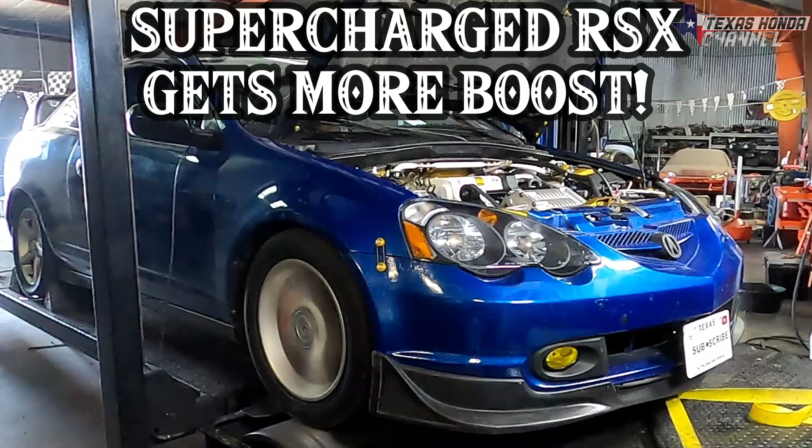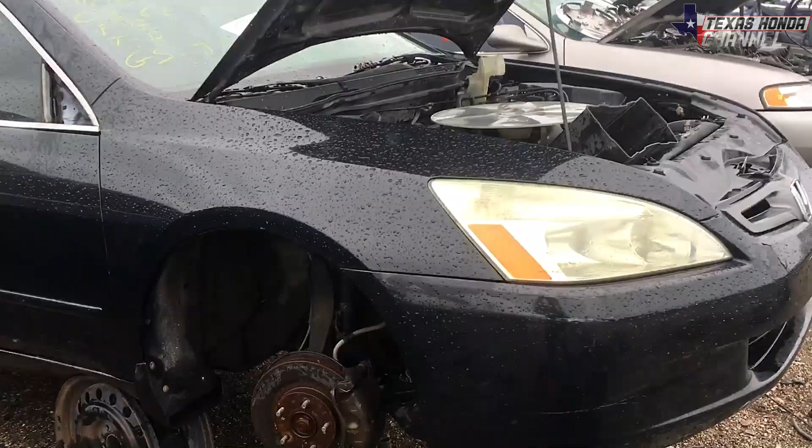Built in Texas. This is a K24 Honda Accord. It's a 2003. And if we take this K24 crank pulley off and put it on my K20, it will increase the boost. So I'm gonna go ahead and get this crank pulley off of this engine, and I'll explain some more.

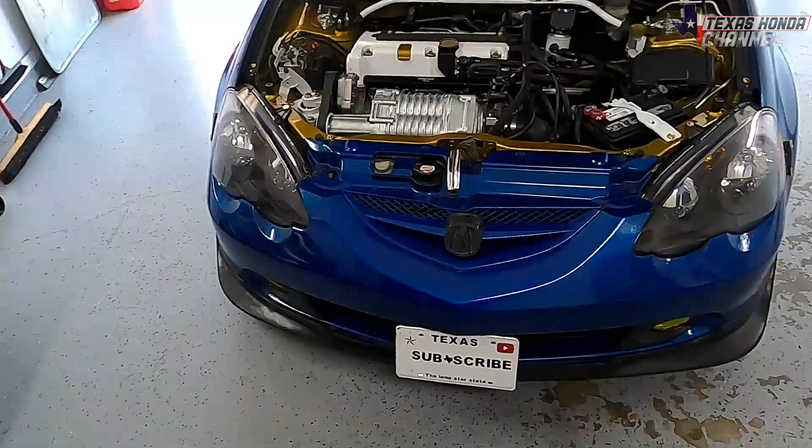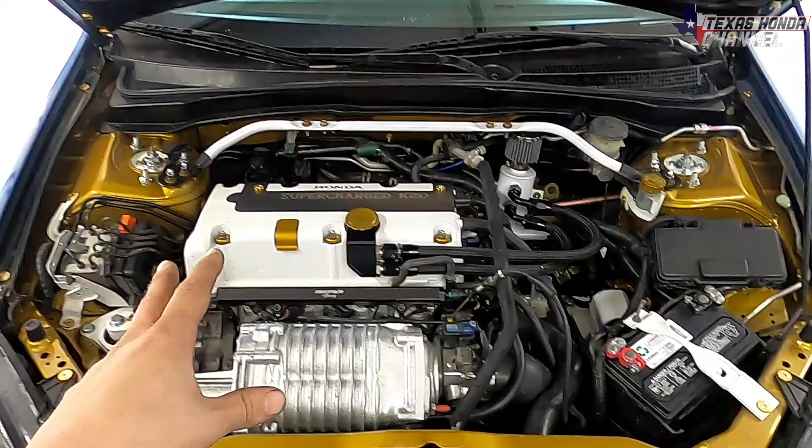So we are going to be taking a K24 crank pulley out of a 2003 Accord K24 engine and putting it on this K20 supercharged setup, which will give us more boost. Then we will be taking it back to the dyno to see how much more power it makes. I did the video last night of putting the pulley on. I'll show you that here in just a second.

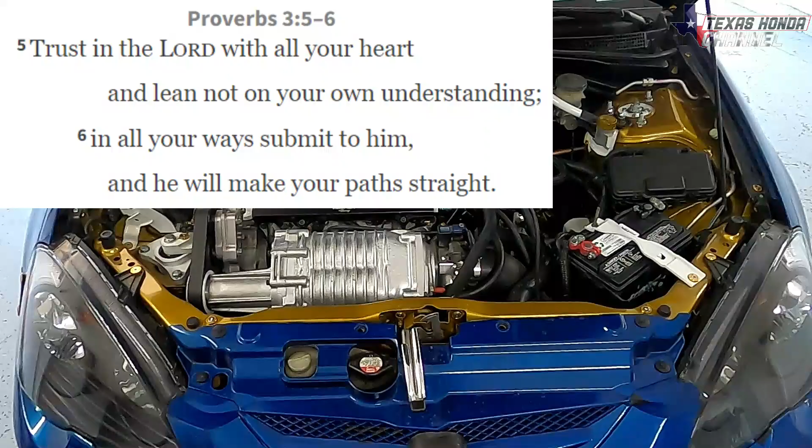But before we get started with that, we're going to be doing Proverbs 3 verse 5 through 6. Trust in the Lord with all your heart, lean not on your own understanding. In all your ways submit to him, and he will make your paths straight. This has rang true in my whole life. I started submitting more to God and being more about him, and things just started getting better. My attitude, my temper is not as bad anymore, and things are just going good. It doesn't mean that I'm perfect in any way, shape, or form. I'm a sinner just like the rest of you guys and needing salvation. I say this out of love, not hate, not to condemn.

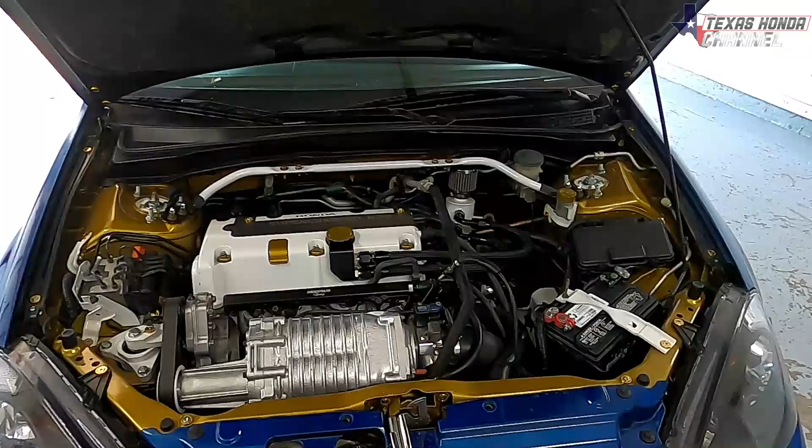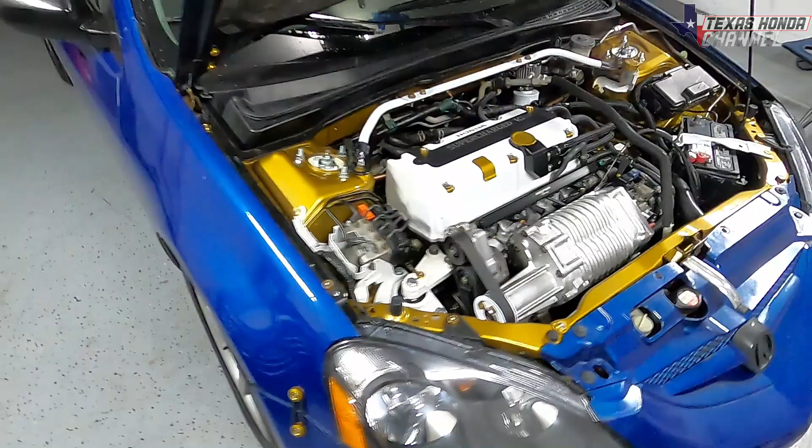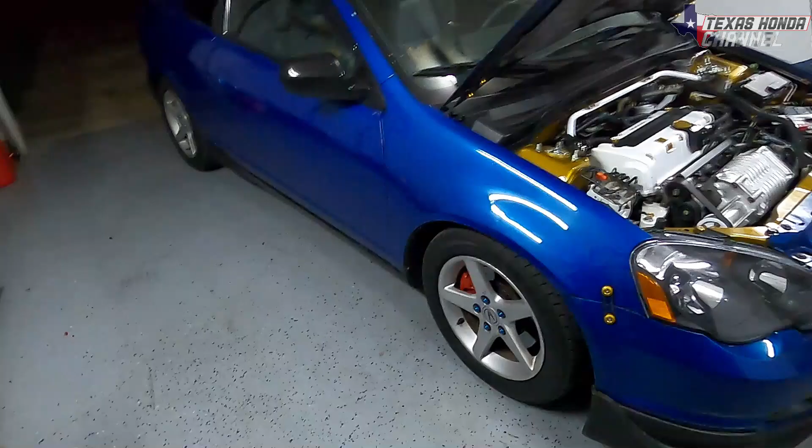I love you guys. But we're going to go ahead and get into the video parts I took last night, so I hope you guys enjoy. Basically just going to get in there, get that crank pulley out, and once I get it out, we will measure, and I will show you how to measure these using this and that math that you probably never thought you would use, pi 3.14. So I'm going to go ahead and get that crank pulley off. I really hope you guys enjoy this video.

All right, so the first thing I'm doing is heating up the actual bolt. This will help loosen it up. I wish I could have done this at the salvage yard, but they don't allow torches in there. People just aren't responsible enough to not blow things up. But yeah, so I'm heating up the bolt.

I want to be very careful because this does have rubber in this pulley. If I do need to use this pulley again, I want to make sure that it's usable. So I'm just heating up the bolt to expand the metal. Then I am going to be shoving this bolt in the flywheel. So I'm going to show you that here in just a second.

Okay, the crank pulley bolt is nice and heated up. Under here you can see we have a racing flywheel. Took a little cover off, you can see the flywheel there. And I put that big thick bolt. It fits perfectly in those grooves, in that little hole, and it's thick enough on the flywheel this will not damage anything. I've done this before many times on different setups, never had a problem doing it.

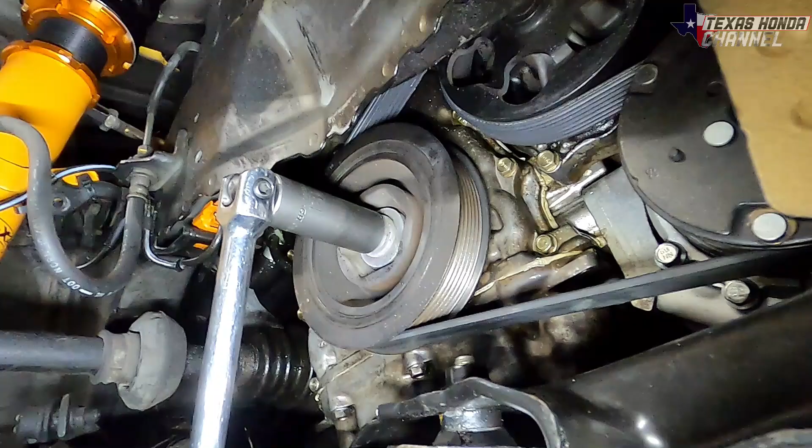Or you can stick a screwdriver in the flywheel teeth and wedge it to a stopping point, and then you can break it loose. I highly recommend using the actual tool for these crank pulleys, or harmonic balancers, whatever you want to call them, because this will be the best option. But since I don't have that right now, this is what we're going to do.

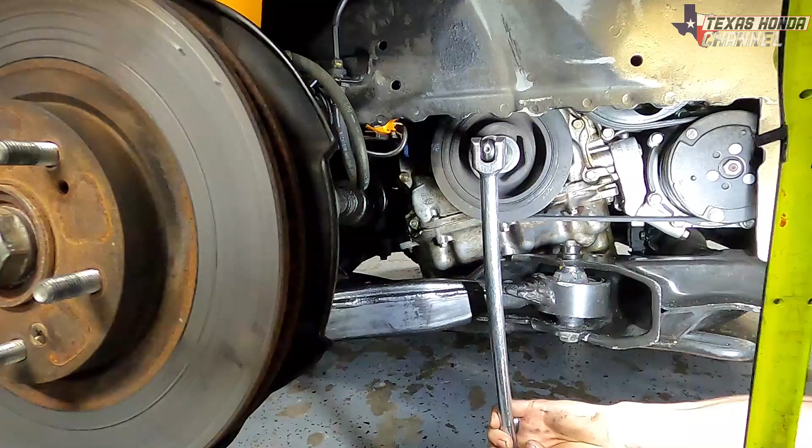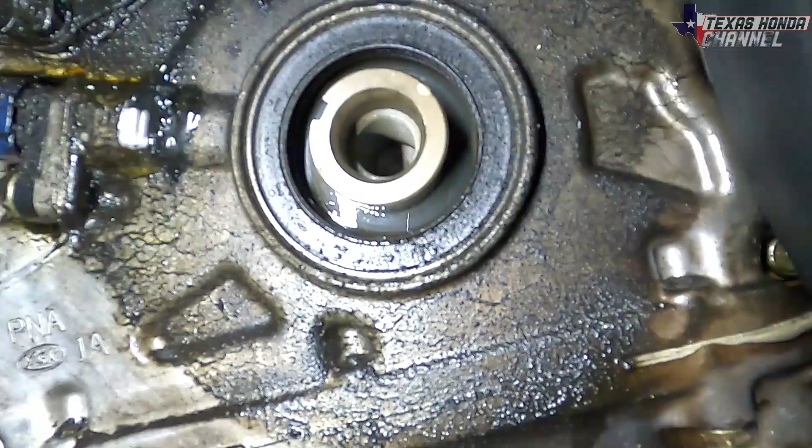Okay, upon closer inspection, we can see that front main seal is actually leaking a little bit. And it looks like at some point something was rubbing against the timing case, but I'll definitely clean that up and keep an eye on it. I do need to get a new front seal for that, so fix that leak. But yeah, we're going to go measure the pulleys.

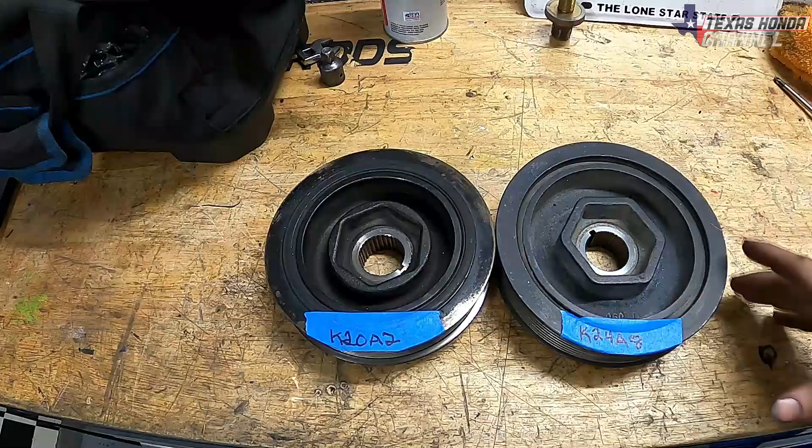Okay, we've got both harmonic balancers next to each other, crank pulleys, whatever you want to call them. We've got the K24A8, which you can tell is just slightly larger than the K20A2. We are going to measure them. This one's still a bit warm, so we'll measure this one first, let that cool down some more.

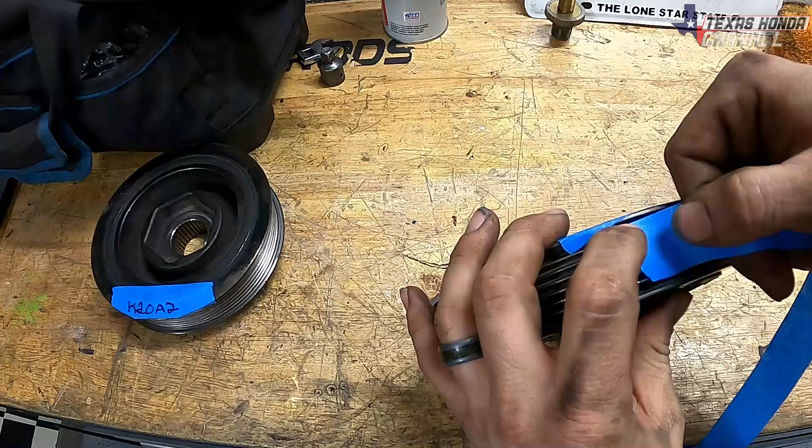You're just going to basically get some tape. We're going to start in one spot. We'll just start right here. Anywhere is fine. We'll keep it in the grooves all the way around, making sure it's pulled nice and tight. That way you've got a good measurement here. I mean, that's close enough. So what we're going to do now, go ahead and pull this tape off and lay it out.

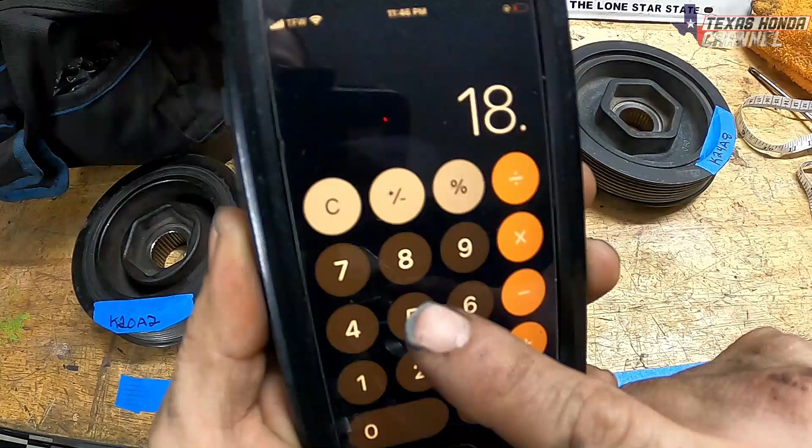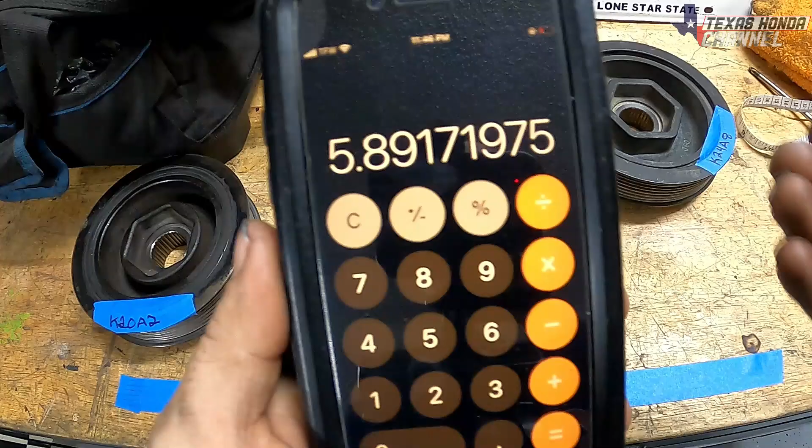Okay, we're going to go ahead and measure the tape from end to end, and we've got 18.5. So this is 18.5 inches. So what we're going to do is go 18.5, divide that by 3.14, which is pi, and we've got 5.89 inches. So this is pretty close to a 6-inch pulley. So we're going to do that same thing to this one.

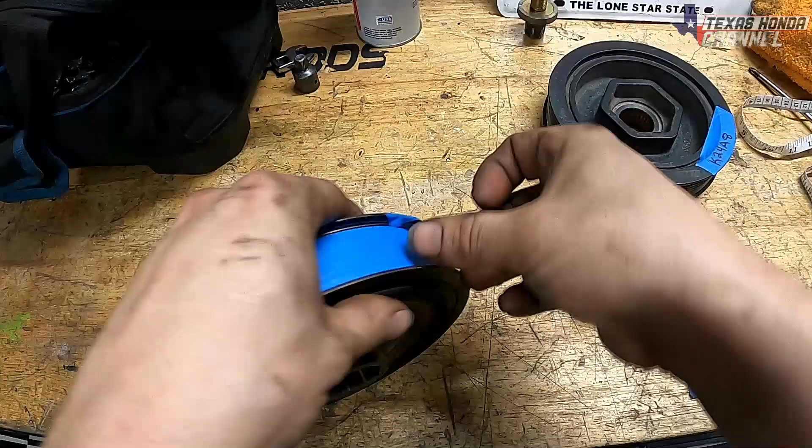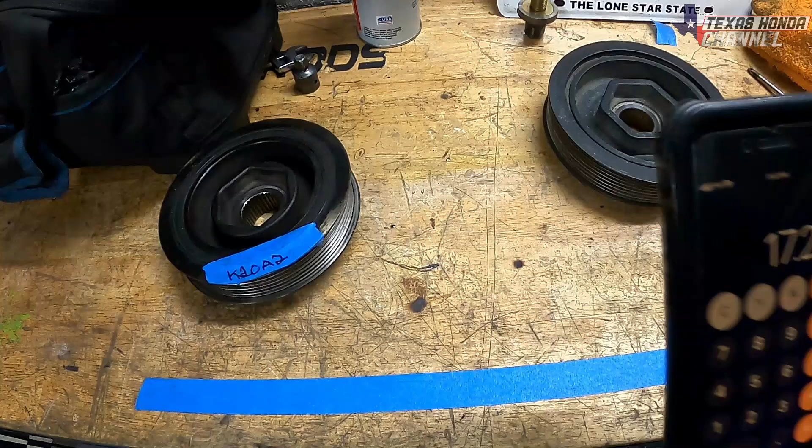All right, this one is 17 1/4. 17.25 divided by 3.14 equals 5.49. So this one is almost a 1/2 inch bigger, which should result in a decent bump of boost. There was someone saying that some of the K-Series pulleys are actually 7 inches. There's a 7-inch pulley out there, which would definitely bump it up, probably 12 PSI. So definitely interesting to make a note of.

So we're going to reinstall this one. Make sure to keep track of the keyway, and we're going to use the bolt that was originally with this pulley. Make sure everything fits. But yeah, we're going to go to the car. I went ahead and cleaned up all of this with brake clean and a rag. Looks a lot better. We can definitely see where it's leaking from after this is all cleaned.

So when reinstalling this, make sure to put the keyway in first. It's easier that way, for me at least. Then we slide it right on there, making sure the belt's not behind it. Okay.

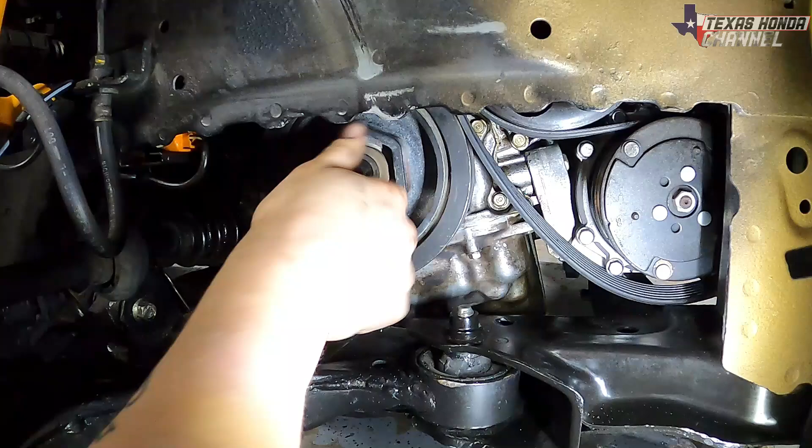And with this bolt, you're supposed to torque it down to 36 foot-pounds plus an extra 90 degrees. If you don't know what that means, once the torque wrench clicks, I go for 90 more degrees. So that's exactly what we're gonna do. Normally I just hit it with the impact and tighten it down that way, put a ton of force with the breaker bar, and I never have an issue. So if you guys want to torque them, I highly recommend torquing them, but just tightening the crap out of them works really well too. I'm just going to be honest with you.

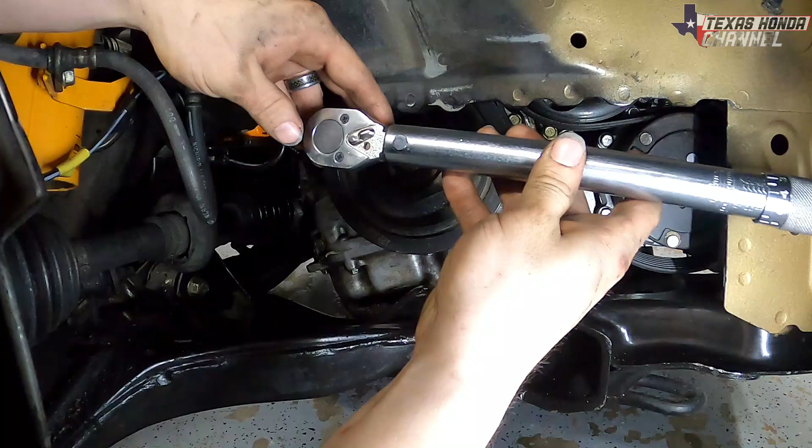All right, I got it torqued with the torque wrench to 36 foot-pounds at about right here. So I'm going to go 90 more degrees. And instead of using this, because it's kind of hard to get leverage with that torque wrench, I'm actually going to use the breaker bar, get more leverage with it. So I'm just going to be putting an extra 90 degrees on it now that it's torqued. And there it is. It's officially torqued down.

So now I'm going to go ahead and put the belt on. You're probably wondering, how are you going to put the belt on if this is a bigger crank pulley? The top adjuster does adjust, so I'm going to have that adjusted. So I'm going to go ahead and do it.

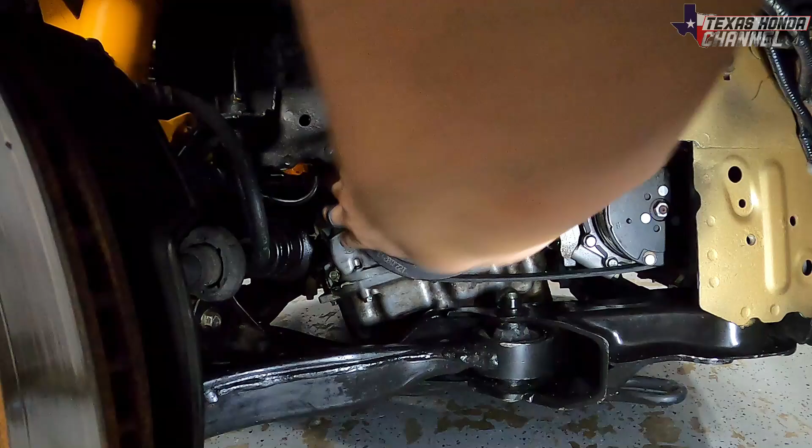All right, so on the back, there's 14mm nuts on this particular adjuster. So I had loosened them up, and then there's an adjuster bolt that goes up top here, and I took it all the way out so that way it could adjust where it needs to. And the belt seems to have plenty of tension, but not too much tension, so we shouldn't have any belt slip issues or anything like that.

Everything's looking pretty good. So I'm gonna go ahead and tighten that bolt back up, and that's pretty much it. Now it's ready to start up. Okay, now that everything's tightened, we made sure the bolt is not left in the flywheel or anything like that. I've had that happen before. It was a very humbling experience, to say the least. Belt tension looks good, so I'm gonna go ahead and fire it up and we'll take it for a spin.

Even at the lower RPM range, I can hear it. It sounds really good. Okay, so I got it all together last night, went ahead and did a data log run just to find out it was only making 1 PSI. So here's the little video clip of that.

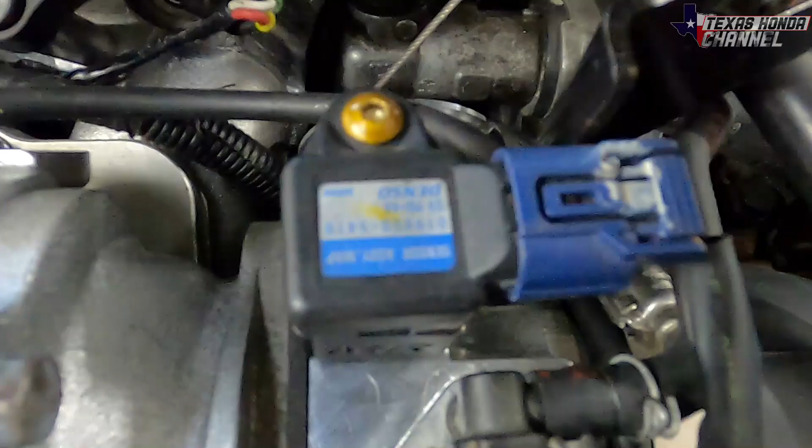Video clip was of it making 1 PSI. I was kind of confused because it still pulled pretty good, I thought. I changed the MAP sensor out and thought maybe that's what it was. So that wasn't what it was. So I decided to look down at the bypass valve down there, and it was actually pinched. It was very weird how it was set up.

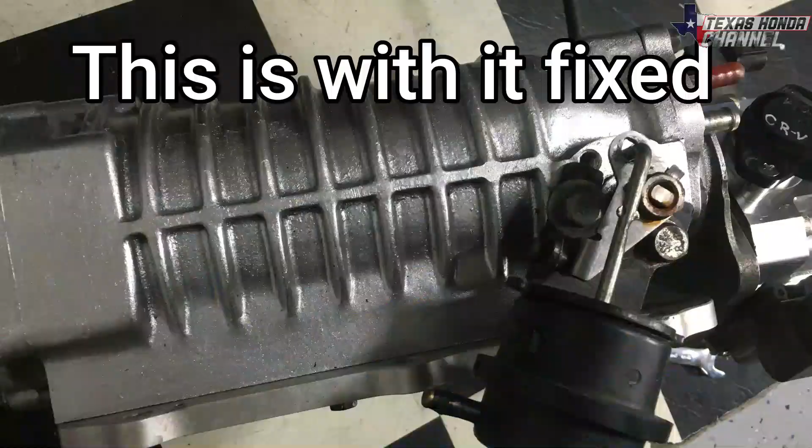I don't know if it was a mistake I made, probably, but I went ahead and took the supercharger off. I didn't do video of that. I was just trying to figure out what was causing the problem, and I got it put on there properly. And now the bypass valve is working properly. So here's a video clip with me just fixing the bypass valve.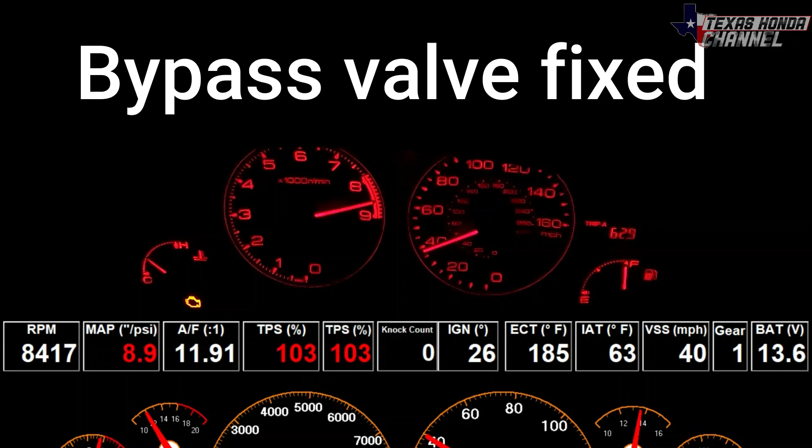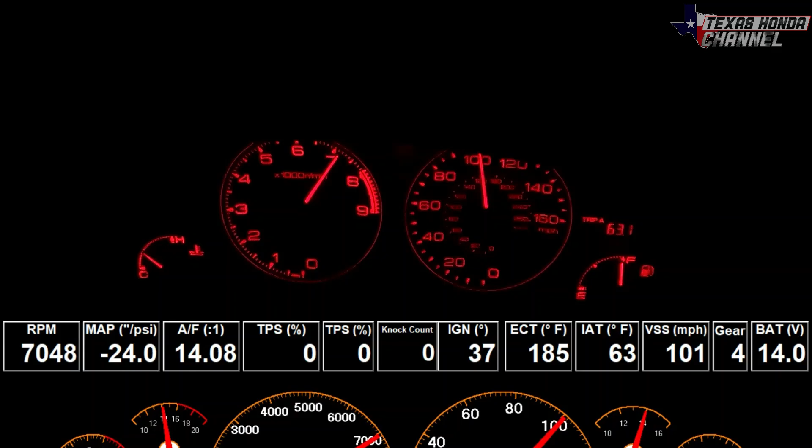So you can see, totally different, way faster now. It blows the tires off like crazy, and that's what I expected the day I pulled it off the dyno, but I just thought, well, this is how the setup's responding to it. So I was only on 1 pound of boost that whole time, which is crazy. So with that being said, we headed back to the dyno at AGN to see what it made, and here's the results.

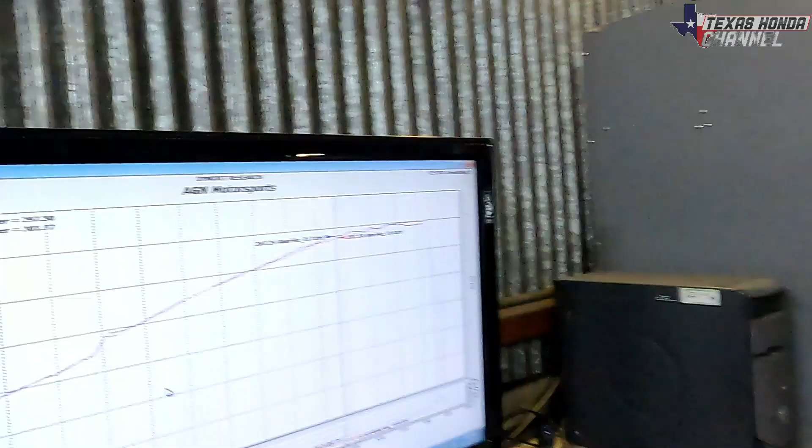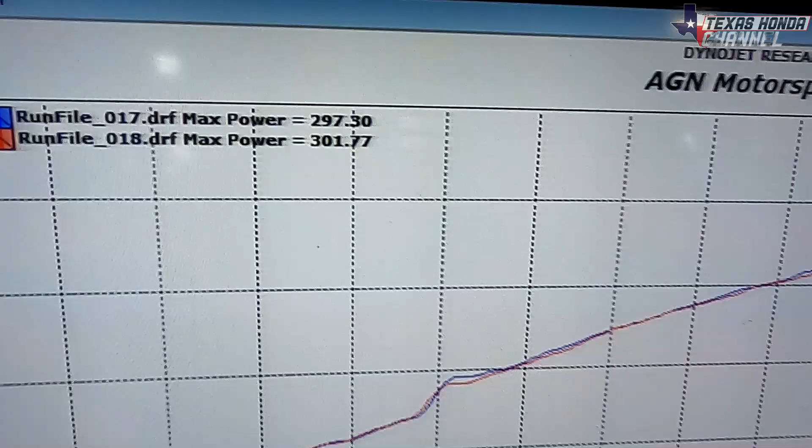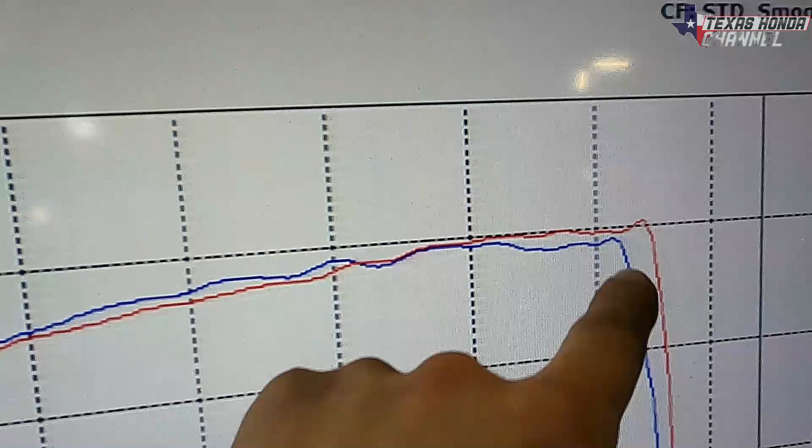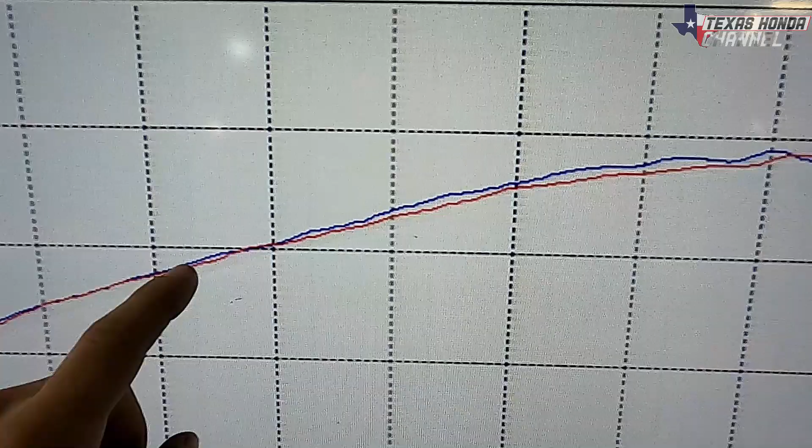Okay, so here it is. The first run file was run file 17, made 297, and then he had to adjust the fuel and stuff, makes 301 now. The blue file, as you see, has a little bit more power in certain areas, but it drops off a little bit on top end. That was because it was leaning out. After he added more fuel and made it safer, it actually lost a little bit of power when you add too much fuel, but it's safer this way. So that red file lost a little here, but it did gain on top end, so that is awesome.

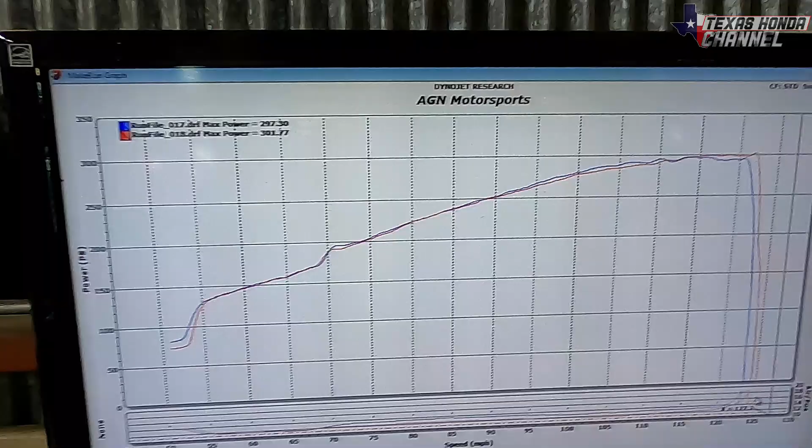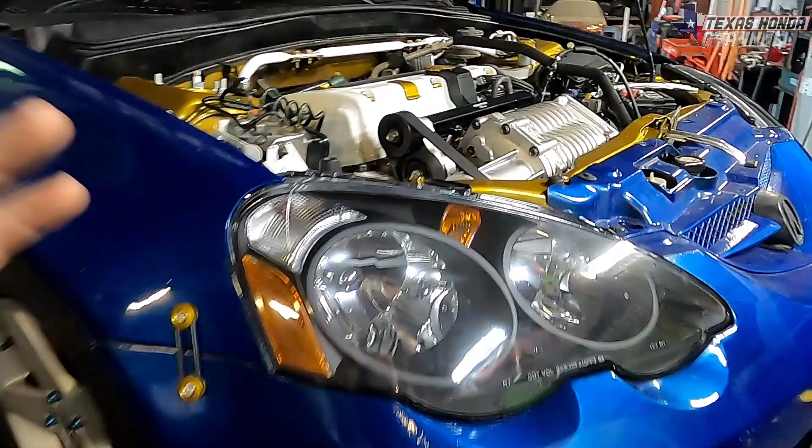He could have made more power with this setup, but that would push the limits of safety. I'm already doing that with the supercharger spinning at the RPM it is. By just putting that K24 crank pulley on there, it definitely is spinning at a higher speed. I think we're spinning the supercharger at 16,000 RPM. John Bond Performance actually gave me the math equation to figure that out.

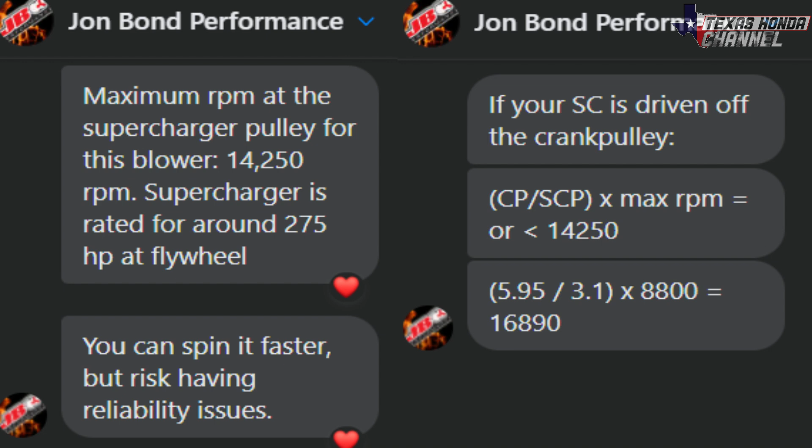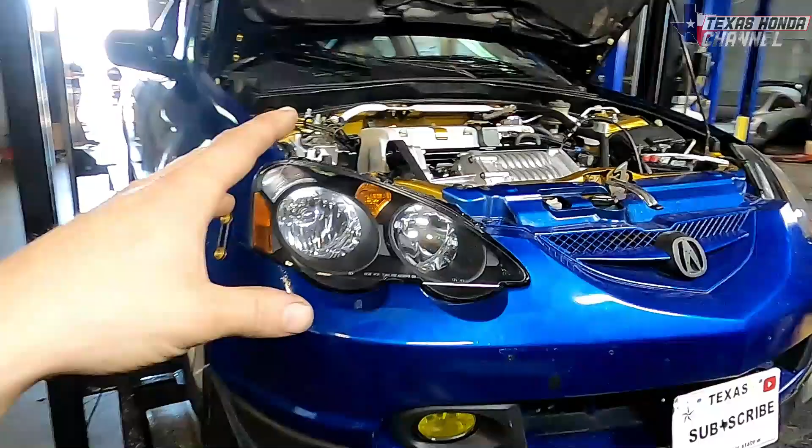So it's spinning 16,000 RPM with this current setup, and this supercharger is only rated for 14,000 RPM. So I do have to back the revs off a little bit, but not a big deal. It'll still feel really good. He said that this will just make it not as reliable, so there could be an issue, but there's a lot more people out there that made more power than this on this kit. So I know I can make more power, but I don't want to make it unsafe.

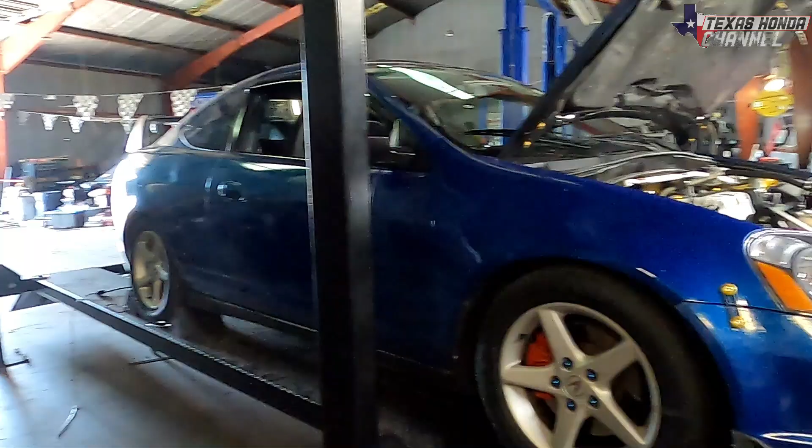But I'm gonna head back to the house. We'll go over more when we get there, and I hope you guys are enjoying this video. All right, here we go.

Wow, this thing's insane. I am super happy with those numbers. 301 is definitely better. A lot of people are asking me if I'm going to go E85 or stay on 93 plus the octane booster.

I personally don't like E85, mostly because I go through it a lot. Every vehicle I've had E85 in, I get terrible fuel mileage, and I'm actually filling up more frequently using E85 than if I was to just use 93. I know it doesn't really make sense, but it's supposed to be more, you know, environmentally friendly or something, but I'm actually filling up more often. It actually cost me more money in the long run to run E85, and I'm just not made of money.

But either way, I will use the 93 daily because I have a tune for 93. It'll be good for that. And then when I go to the track, I will put the 93 plus octane booster tune on, which will make me at 101 octane. Those will just be for track days, so it'll work out perfectly in the end. But yeah, I'm really happy with this and well pleased with Eric's tuning methods. He made it safe but made it make power, and there's still a ton we can do to make even more power.

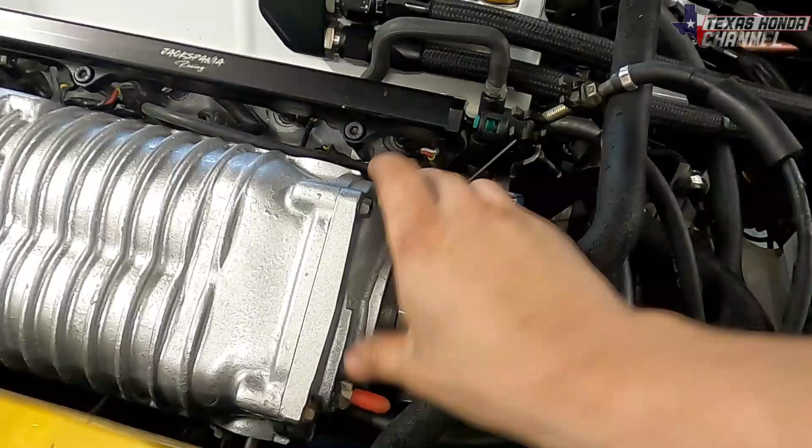They have an adapter here that smooths out the supercharger's intake flow. I already have an upgraded throttle, so I won't need one of those. I just need that piece, but it's like $400, so I don't have money for that right now. But regardless, 9 pounds of boost is just the right number. That's what I wanted on this setup. We can also swap K24 cams in it to make a little bit more bump in power and do some port work. Like, there's still a lot we can do.

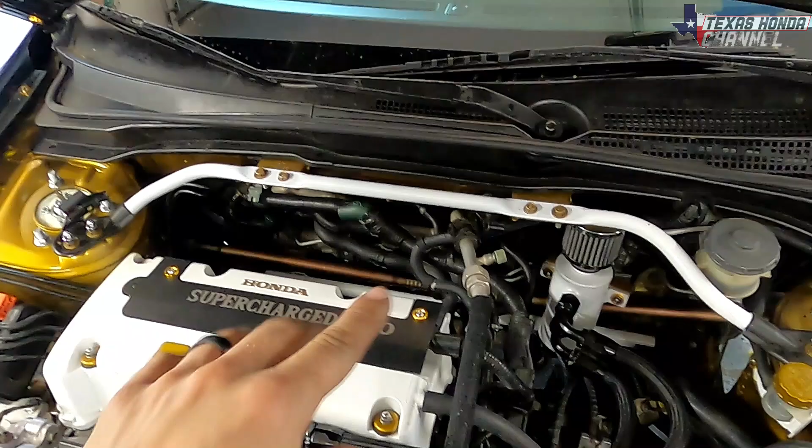With that being said, I do have to get some new brakes all the way around on this, so I have that kind of figured out. I have to get new CV axles. Once I get those, and then a steering component which will help keep the car straight on the road, because this thing has crazy torque steer, which I will go over all of that in an upcoming video. But again, huge shout out to Eric over at AGN Motorsports in Killeen, Texas. Does a phenomenal job, and I'm well pleased with his work.

But yeah, it's definitely pulling exactly how I want it to now. There's definitely a difference from the K20A2 pulley to the K24A8 pulley. The K24A8 pulley, being just slightly bigger, did bump the boost level up from the 7.5 to a 9.4 or 9.5 PSI. So it definitely makes a difference.

I could probably get a smaller pulley to go higher, but if I go any higher of boost, I have to get an aftercooler, which basically bolts right under the supercharger and has a small radiator that it circulates coolant through, and it has an external radiator for it. But that's a really expensive mod, and I don't have money for that either right now, but I do have plans, lots of plans for this, and I cannot wait to get it to the track to see what it does going down the track. It is an incredibly quick setup, and it pulls really hard, so I am well pleased with this.